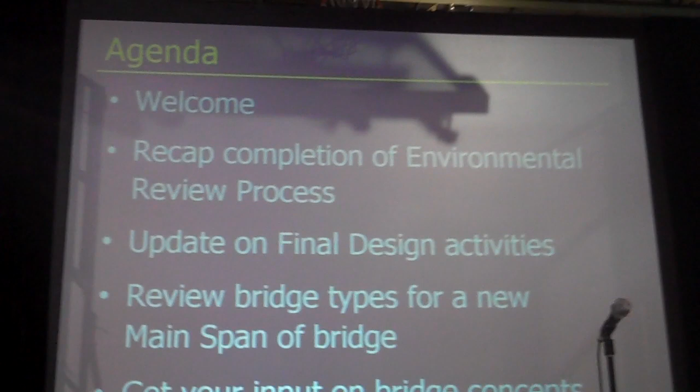This allowed us to move into the final design phase. We'll also give you an update on some of the final design activities that were completed over the past 9 months, and some of the activities that are still ongoing.

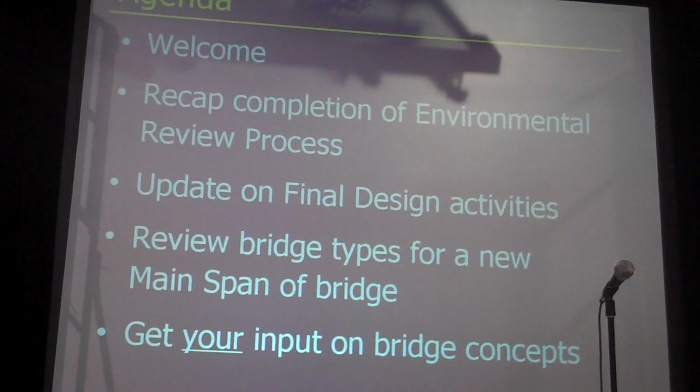Then we'll describe the information that we presented here tonight and how you can provide input for the project. At the end of the presentation, as Harold mentioned, we'd be happy to answer any questions you may have, before you head out to view some of the station information, if you haven't already done so.

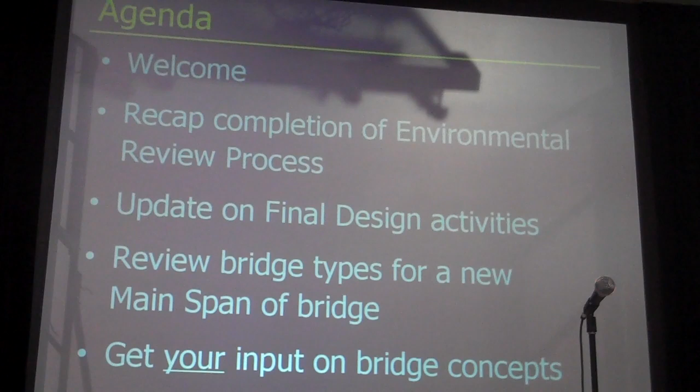After the public hearings held in April 2007, the department addressed all comments received on the draft EIS, including oral testimony given at the hearings as well as written comments received in the months following. The department completed required coordination with key agencies to resolve the remaining issues, which allowed us to publish the final EIS in December of 2008.

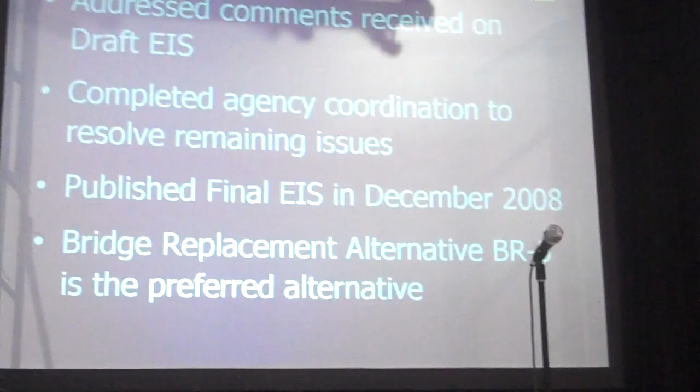The final EIS identified a bridge replacement solution, alternative BR5, as the preferred alternative. As we documented in the final EIS, the comments received on the draft EIS showed tremendous support to select a bridge replacement alternative, and specifically support for alternative BR5.

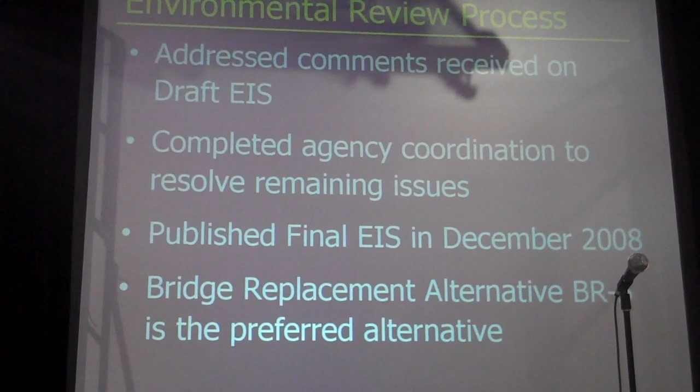The Federal Highway Administration, FHWA, signed a record of decision in March of last year. The record of decision is the design approval document, and it approved alternative BR5 as the selected alternative, the alternative to be progressed in final design, granting the department authorization to begin final design.

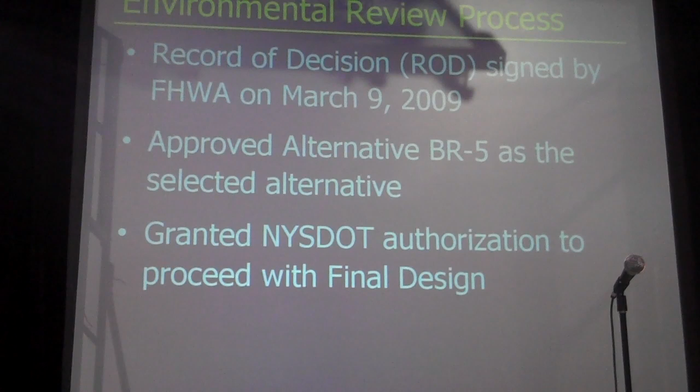Now, what exactly is alternative BR5? For those of you fairly new to the project, alternative BR5 is an alternative that will replace the existing bridge in its entirety, by building the new bridge right next to the existing bridge.

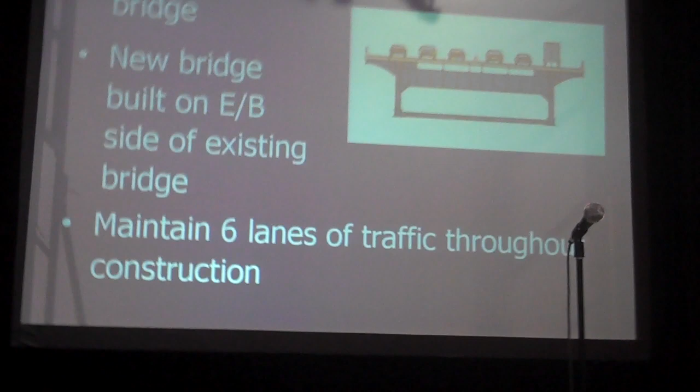This is a simple cross-section of the existing bridge, taken at the approach. You can tell it's the approach because the supporting elements are below the roadway. On the main span, the supporting elements would be above the roadway.

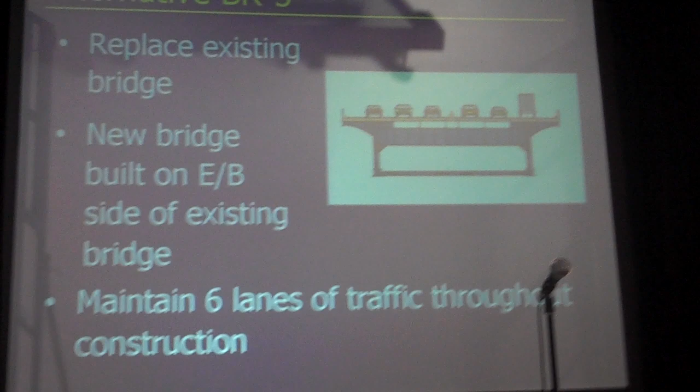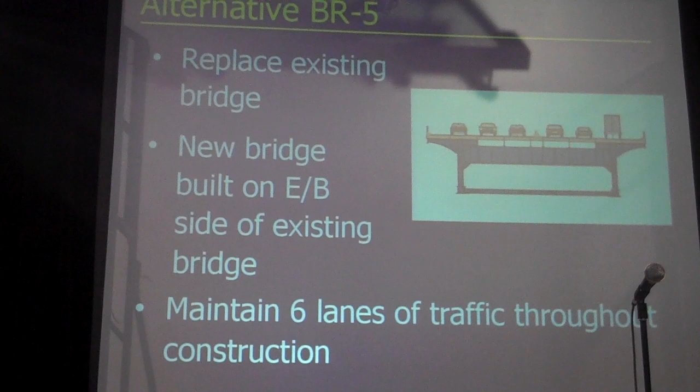This section is looking from Brooklyn towards Queens, and it shows how the existing bridge carries the 6 lanes of the Brooklyn-Queens Expressway, with the 3 westbound or Brooklyn-bound lanes to the left, and the 3 eastbound or Queens-bound lanes to the right. The department has been committed from the very beginning of the project to maintain the 6 lanes of BQE traffic on the expressway throughout construction, with no detours and no diversion of traffic down to the local streets.

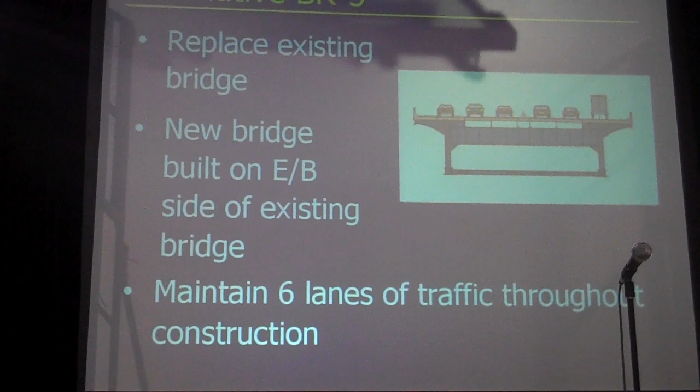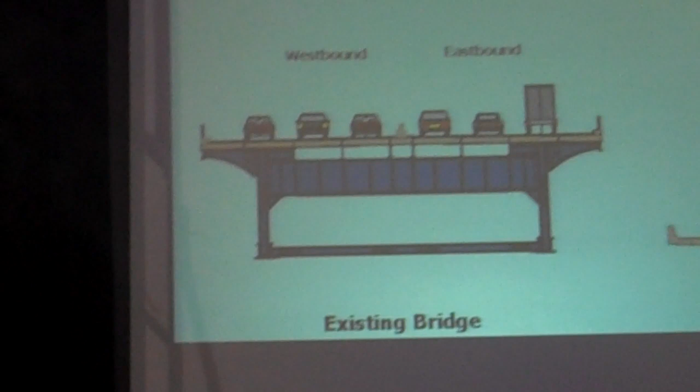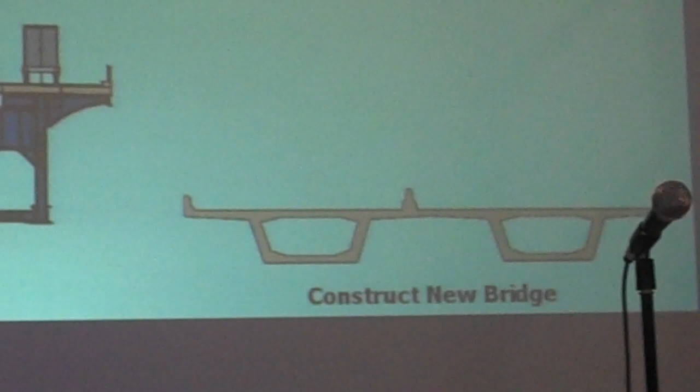Now, this is how we plan to do that. Again, here is the cross-section of the existing bridge looking from Brooklyn towards Queens. We would first build the eastbound, or Queens-bound, portion of the new bridge on the eastbound side of the existing bridge. You can see how the eastbound structure is a little bit lower than the existing bridge.

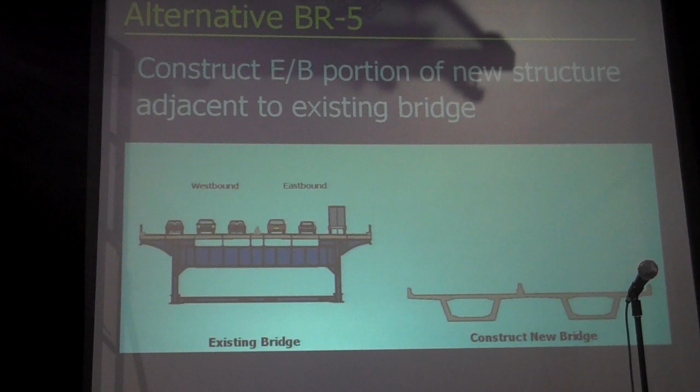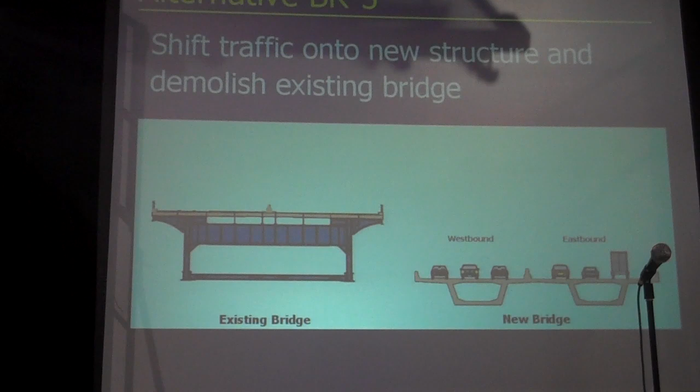When the eastbound structure is completed, we'll shift all 6 lanes of traffic onto that structure, with no detours and no diversion of traffic. That will allow us to demolish the existing bridge and remove it completely.

Once removed, we'll build the westbound, or Brooklyn-bound, portion of the new bridge within the footprint of the old bridge. All traffic will be maintained on the eastbound structure, which will be wide enough to accommodate all 6 lanes until the new bridge is completed.

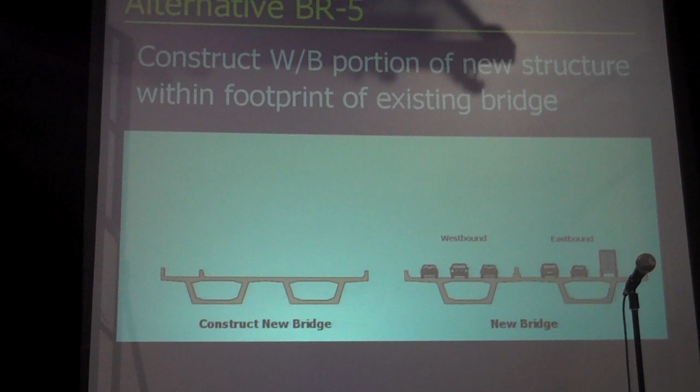In its final configuration, the new bridge will be built at a lower elevation, low enough to significantly reduce the roadway grades and improve sight distances, but still high enough to allow any tall ships that may have to travel down the creek to safely pass under it. The new bridge will include standard lane widths and standard shoulder widths, improving safety and operational conditions on the bridge. The existing bridge has no shoulders.

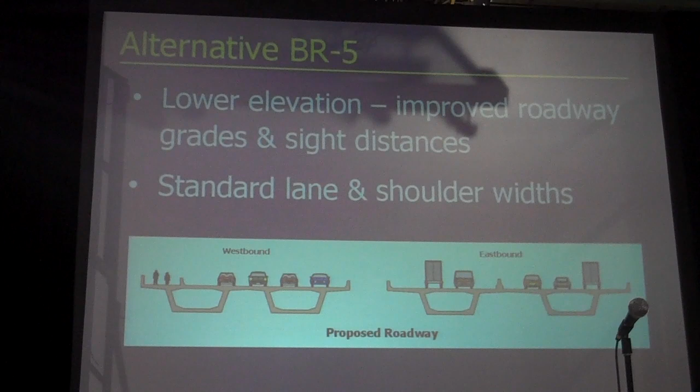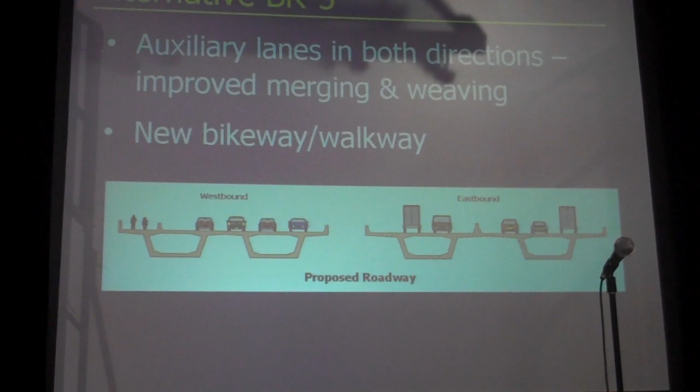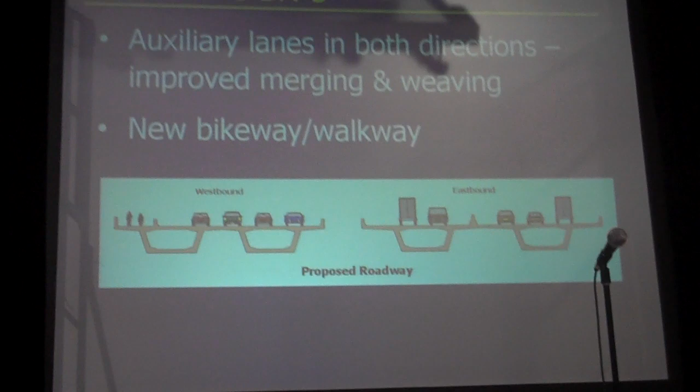The new bridge will include auxiliary lanes in both directions, simply the ramps from Brooklyn connecting with the ramps in Queens, providing continuous lanes across the bridge. This will significantly improve the merging and weaving problems that exist today. The eastbound structure will physically separate traffic that wants to stay on the BQE, heading up to Queens Boulevard and the Triborough Bridge, from traffic that wants to exit to the Long Island Expressway, eliminating that merging and weaving problem.

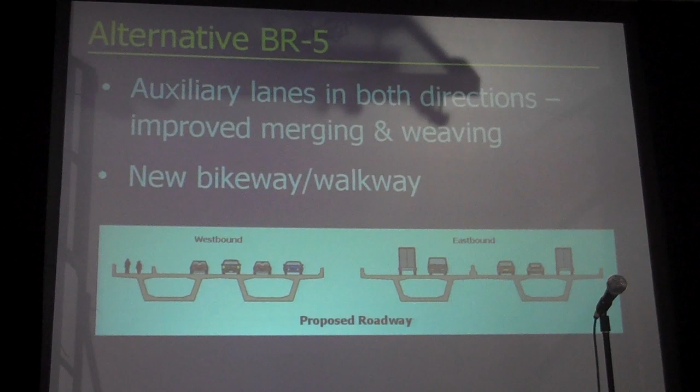Of the comments received on the draft EIS, there was tremendous support to select an alternative that included a bikeway walkway. The new bridge will include a bikeway walkway on the north side of the westbound Brooklyn-bound structure, the side facing Manhattan. We expect to get some pretty wonderful views of the Manhattan skyline from that bikeway walkway.

The graphics you've just seen are not much different than the conceptual drawings included in the EIS. In the final design phase, we're going to move away from these conceptual drawings and start to develop detailed engineering drawings.

Critical information was obtained over the last 9 months through initial activities needed for the detailed bridge design, including field surveys, geotechnical investigations, and environmental inspections. If you were out at the bridge site at any time during the past 9 months, it's very likely you saw a number of people out there progressing these initial activities.

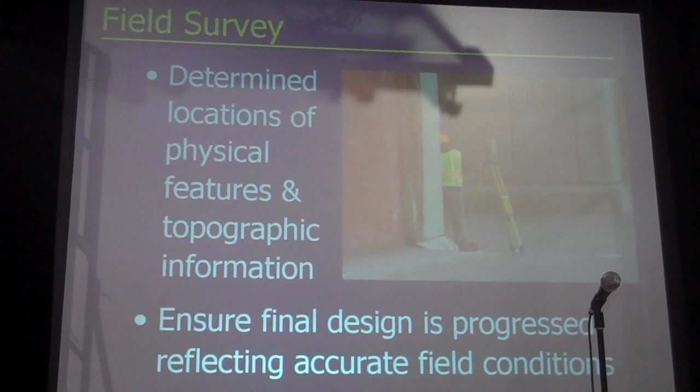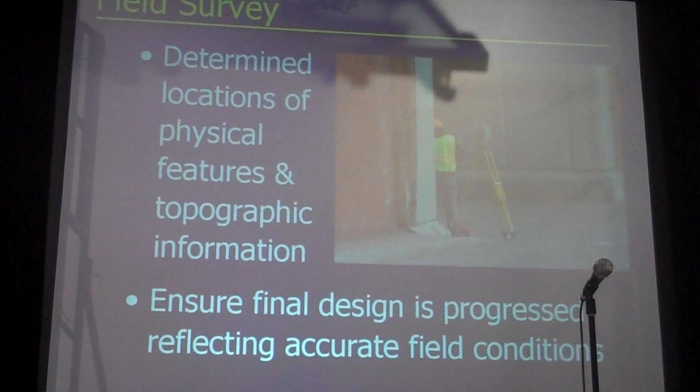One of them being the field survey. Crews completed field surveys to obtain exact elevations and distances needed for the detailed design. This will ensure that the final design is completed with the most accurate field conditions. They also captured any changes that may have occurred within the project area since we started the job back in 2002. This is a photo of one of the field surveys conducted, at the bridge in Brooklyn near Cherry Street and Varick Avenue.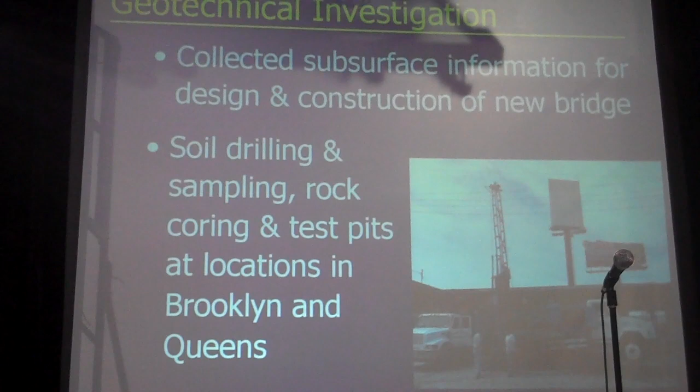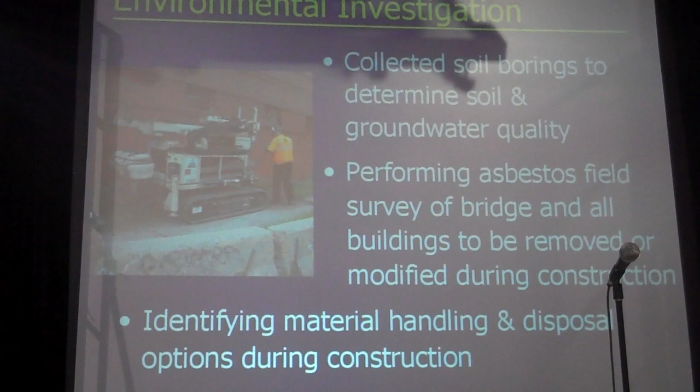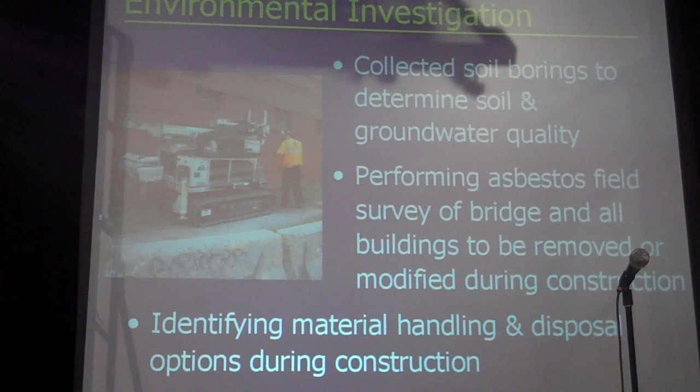The environmental investigations: crews collected samples to determine the soil and groundwater contamination quality that exists throughout the project area. They also completed asbestos surveys on the bridge and adjacent buildings. This information is needed to develop safety procedures and protocols to protect workers and the adjacent community during excavation and demolition operations that may disturb some of these materials during construction. This is a photo of the equipment used to take some of the samples along the new bridge alignment.

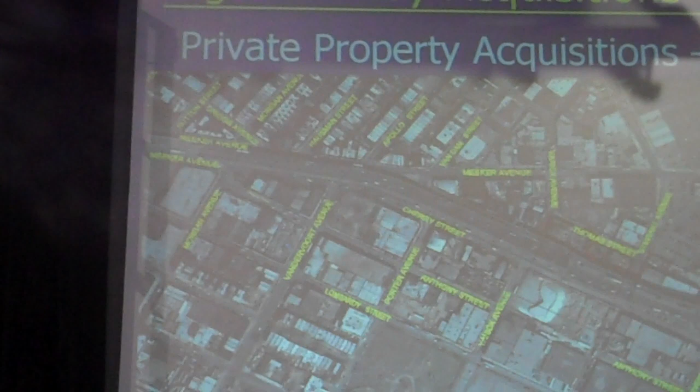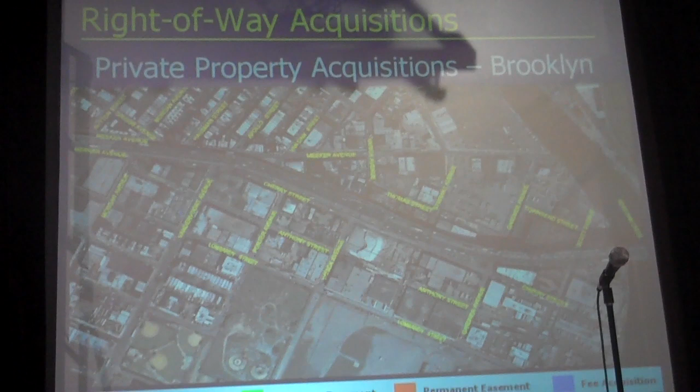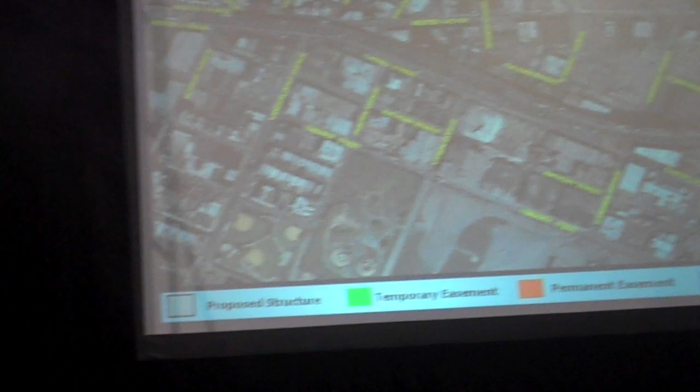When the record of decision was signed last March, we initiated two parallel processes: the final design, which we've begun to talk about, and the right-of-way acquisition process. As I mentioned, the department is committed to maintaining the 6 lanes of traffic on the BQE throughout construction, with no detours or diversions of traffic down to the local streets. In order to do that, we have to build a new bridge next to the existing bridge, and as documented in the EIS, that will require the acquisition of private properties next to the bridge in order to complete the project.

This is an aerial photo of the Brooklyn side of the project area. You see the BQE kind of snaking through the middle there. The white or gray color is the footprint of the bridge.